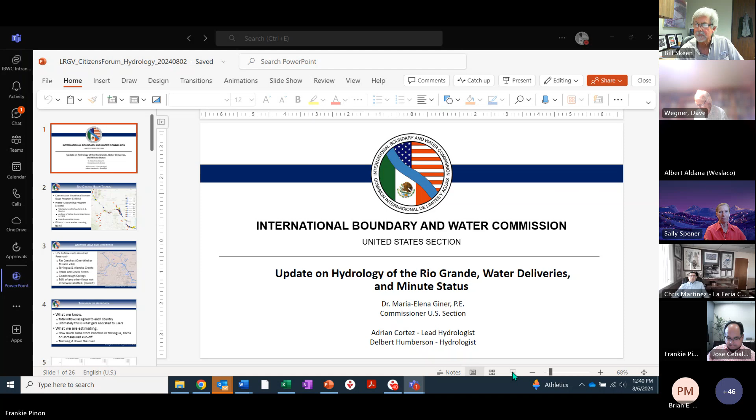Santiago Caicedo, report here, thank you. Historical Commission, Jason Labos. I'm supposed to get on a webinar. Daniel Gonzalez, Cedar Property. Elijah Goff, Texas General Land Office. Arthur Zeniga with Baskin Limited, Moreno. Michael Reyes, Ecological Services, U.S. Fish and Wildlife Service. Jack Cano with the LRGBC. Georgina Mayor, TCEQ, Rio Grande Watermaster. Arturo Cabello, Brownsville Irrigation District. Greg Harmon, Cameron County Irrigation District number 2 and Cameron County Drainage District number 3 and 7. Ruben Saldana, wearing two hats, Texas A&M AgriLife Extension Service and City Savings. I'm Paul Ross, I'm the A&M AgriLife Extension Service, College Station. My name is Ruben Oviedo, I'm the District Director for Congresswoman Monica de la Cruz, Texas 15. My name is Rene Perez, I'm with TCEQ, Border Affairs, Region 15. Colin McDonald, the Texas Water Foundation. Okay, I'm still in the Texas Master Naturalist Program. These 2 hours count as a class training.

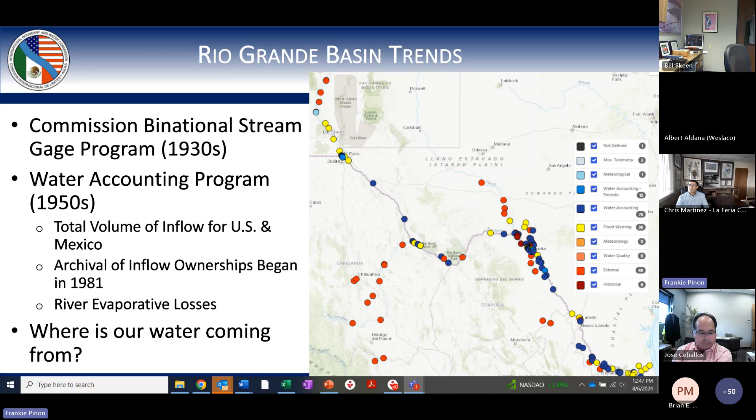So using that data, we're seeking to answer the question: where's our water from? If you're familiar with the treaty, then you already know this answer, but if not, I'll spell it out. If we're looking at Amistad Reservoir, the inflows that belong to the United States, as dictated by the treaty, include one-third of the Rio Conchos.

That comes in from Mexico, unless Minute 234 is in effect. That's a special agreement between the countries that lets us get more than one-third in the event that there's a five-year cycle that ends in a debt. You can imagine the second five-year cycle after that, it's hard to pay back that debt and meet that cycle's demands at just one-third, right?

So Minute 234 gets activated and we might get up to 100%, which is what happened in 2020. We were getting 100% of all the six tributaries that are named in Mexico. The other places we get water, Terlingua and Alamito Creeks. Those are, if you look here, we got Big Bend region, Alamito and Terlingua are right here, kind of between Presidio and Big Bend. That's 100% United States water.

Also belonging to the United States are the Pecos and Devils. So if you can see, am I standing your way? Can you guys see? Not there. Okay, we're familiar with it.

All right, so Amistad Reservoir, Amistad Reservoir is right here in the map, and the Pecos and Devils flow pretty much straight into the reservoir. They're also 100% United States water.

Also, Goodenough Springs is named in the treaty. You may or may not have heard of Goodenough Springs. If you have heard of it or haven't heard of it, it's been inundated by the lake now. We made the lake, it covered it, but we have a process in place to make sure we're still getting that water, because even though the lake covered it, that's still water coming in, and that is United States water.

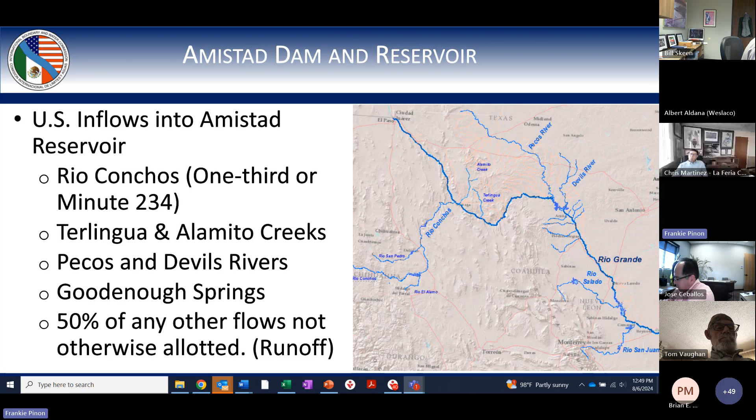Now that's all the stuff that's measured. We also have water that shows up - you can imagine there's a lot of unmeasured tributaries. When it rains, it flows, and when that shows up in the reservoir, we get 50% of that, and the other 50% goes to Mexico. So that's where our water comes from.

On the side, what we know from our historical accounting already and our archive data is what inflows belong to each country. We've done that math, figured it out, and that's what gets allocated to users. We do it with preliminary data on a weekly basis, we communicate frequently with TCEQ on that, and then we also do monthly accounting with final data.

Now, what's new is tracking exactly which water source that came from. So the way our accounting works is, here's a reach of river - maybe the Rio Grande comes in. We have water coming in from upstream on the Rio Grande, and we say, okay, based on our analysis, the water exiting this reach is 60% United States, 40% Mexico. Just an example, but then that's it.

We don't keep that fidelity of what percentage of that came from the Conchos, what percentage came from Alamito, right? And so then we move down to the next reach of river. We just know 60% United States, 40% Mexico, and we repeat that process. So in our accounting, the final number we have going into the reservoir, we know the percentage along with each country, but what was the exact source?

And this is what Adrian did. He did a new analysis that actually tracks the water by source. We regain that fidelity, and that's what we're estimating with this analysis we're going to go for. We're tracking those sources as they go down the river. You could probably imagine why that's important as we're entering these low storage periods, these low inflow periods.

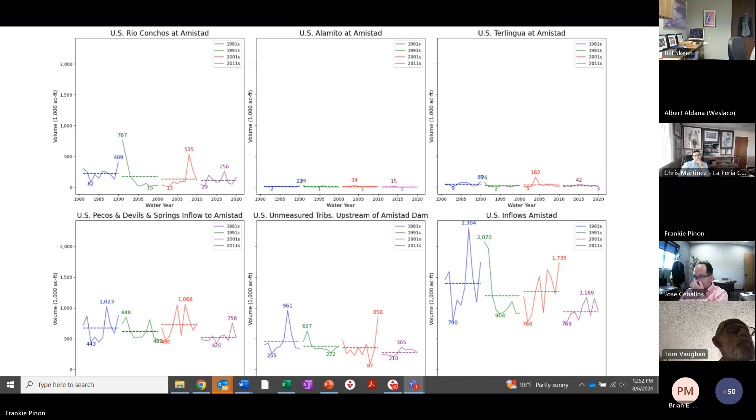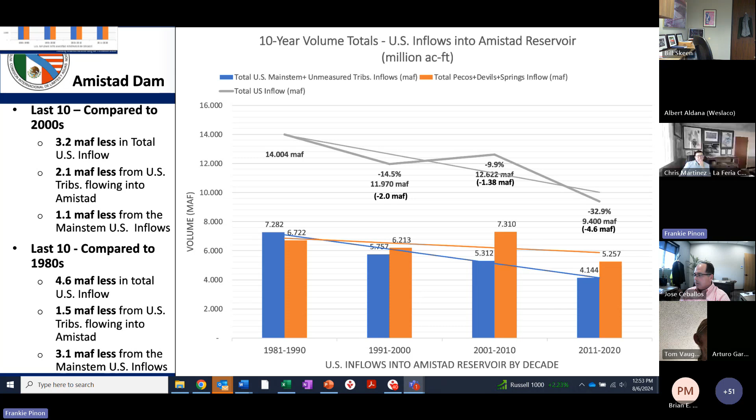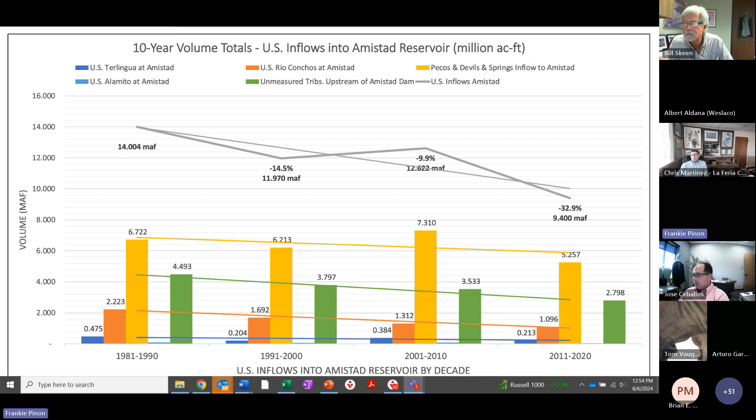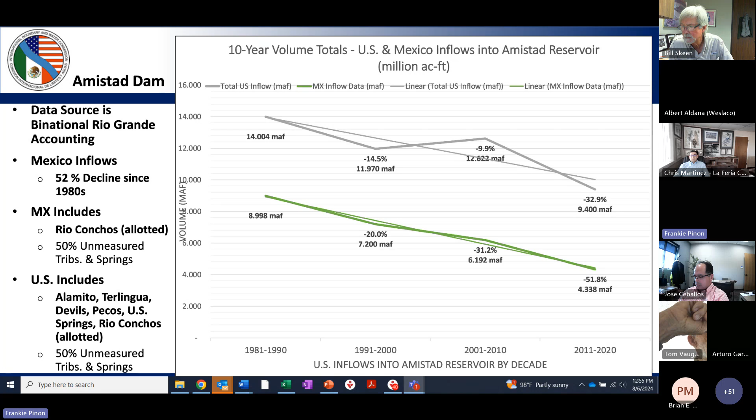But for them, because their overall volume is smaller, it's about 52% less for them. For us, it's about a 33% decline. Still a big number. Still a big number.

So let's talk about Falcon. Let's move downstream. What flows into Falcon that belongs to the United States? Well, we get 1/3 of the Mexican tributaries that are named in the treaty, or more, from Minute 234, just like the Rio Conchos. So you have Arroyo de las Vacas, the Rio San Diego, San Rodrigo, the Escondido, that's the middle Rio Grande tributaries, and then Rio Salado, which flows right here down into Falcon.

Oh sorry, that's not there. It's right here, down into Falcon. We also get Pinto Creek and San Felipe Creek, those are all 100% United States waters. And then, just like in Amistad, we get 50% of what's unmeasured. One thing to note, anything that we release out of Amistad also shows up in Falcon, but we removed those waters from this analysis. We are focusing on new water introduced to the system, because that water was already accounted for when it entered Amistad.

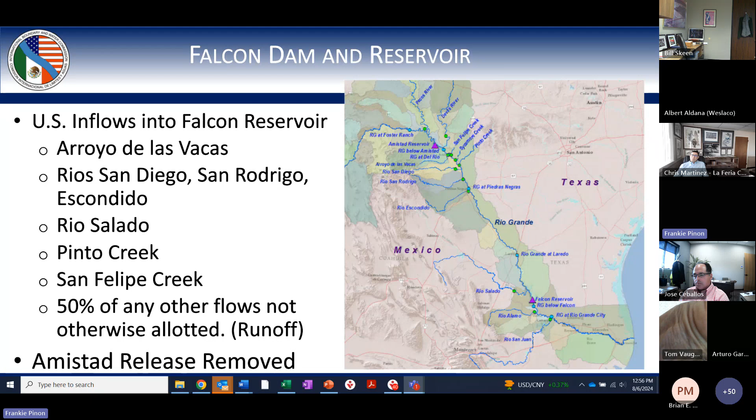Here's that same plot. Pinto Creek, San Felipe Creek, like the other creeks, Terlingua and Alamito, not a whole lot there. Here's the middle tributaries from Mexico: the Rio San Diego, San Rodrigo, Arroyo de las Vacas. That's the middle tributaries, a lot of variability from year to year.

Rio Salado, that's Hurricane Alex in 2010, pretty big outlier. But even without that outlier, you're looking at 21,000 acre feet and 300 something there. So there's a lot of variability in one. Same thing, y-axes are the same scale, so you can compare across.

Let's group it by decade. Same graph we saw for Amistad, but by source. Yellow is the middle tributaries from Mexico. Blue is the Rio Salado coming in at Falcon. And then this is the 50-50 water.

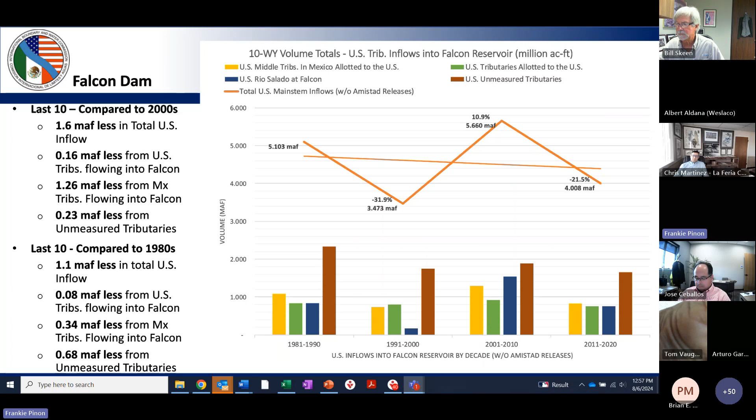The story here is not as drastic as we saw in Amistad, but it's still there. Since the 80s, the data show less water coming in each year. Looking here, it's about 1.1 million acre feet less, whereas Amistad was 4.6.

So in summary, we saw a big decline in flows in Amistad over this period, a 33% decrease, which breaks down annually to 460,000 acre feet a year. That's what it breaks down to in loss. A 24% decrease for US tributaries, and for Mexican tributaries, 51%.

That's Mexican tributary flow that belongs to the United States. Unmeasured tributary flow, 38%. Falcon, there's a breakdown ranging from 9 to 30%. That's the story we're seeing in the data - there's just less water entering the system in the last 40 years, less water entering the reservoirs.

If you want to target the slide - yes, just go back to the previous slide. One of the things that I think is important to highlight is this decrease in hydrologic water.

Mexico's decline could be made up with reservoir transfers, which is not reflected here. Reservoir transfers don't flow into the river - those are transferred ownership later. So that's not reflected in this analysis.

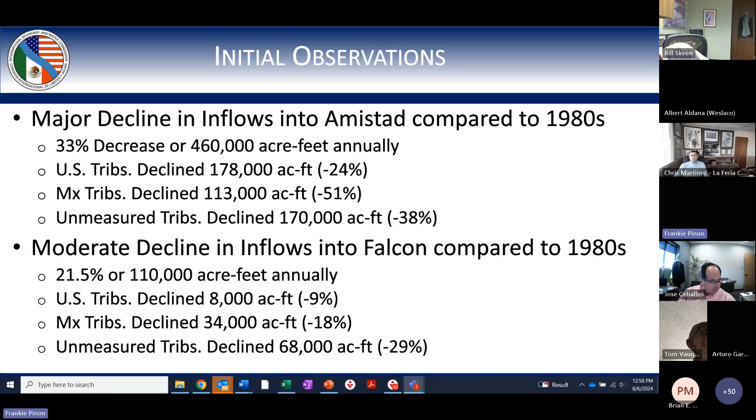What I have in the next slide, which I just realized is how small it is - let's go to the... oh, me, that's me, okay. Oh wow, this is really hard to... I just realized that. Okay, so what I did was, as part of my research, I also looked at the state water plan for 2022, and Jim Darling will be able to talk, I'm sure, circles around me on this.

But one of the things that I wanted to highlight with this presentation is that particular plan highlighted that 90% of the water from the Rio Grande Basin is what the region depended on, right? So what I'm trying to show with this, or what I asked Delbert to try and show, is that the region is vulnerable because it's a diminishing supply, but also because of the variability, okay?

The other thing that I wanted to show here is they do a projection of existing supply. First of all, the population in the region is expected to grow - let me hear it, oh there we go. If the region is expected to double in population by 2060, they are assuming a consistent existing supply that the Rio Grande is going to be providing, about 900,000 acre feet per year.

But the demands are 1.7 million acre feet per year. Now, 1.4 million of that is agriculture. So when there's less supply in the water and there's vulnerability, agriculture is what's hit, unfortunately, because of that, right? So right here, the deficit or the gap is about 900,000 acre feet.

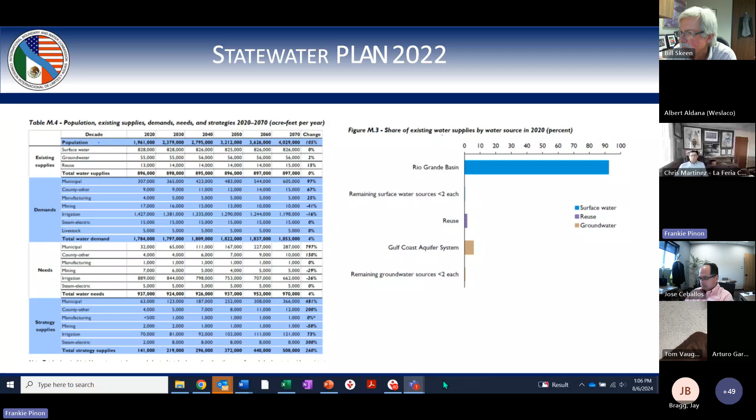Okay, let's go on to the next slides to show what's happening. As you know, Mexico is very much in arrears in their water deliveries. They are in arrears about 839,000 acre feet.

We've got until October of 2025 for them to make up that difference. On this x-axis are the years, on the y-axis is the volume. If Mexico were to make their annual average delivery of 350,000 acre feet, that would be the red dashed line.

Going back to the 1992-97 cycle, Mexico's ability to meet their threshold of 1.75 million acre feet has been a real challenge almost every single 5-year cycle, with the exception of the 2007-2010 cycle when Hurricane Alex hit.

So these are the other cycles. This one's the 2020 cycle—we're at, this is probably one of the better cycles, except at the end they had some debt from the cycle before, but they made it up at the end. This was the 2015 cycle, ending in 2015. This is the 2007 cycle. The 1997 cycle is when we started seeing problems, followed by the 2002 cycle that ended in 2002. This is where we're at now, shown in black.

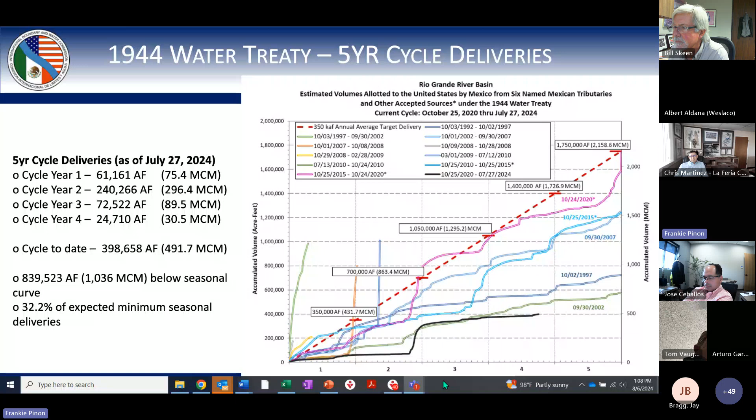And then, of course, our reservoir levels hit a record low on June 19th. I ask every week, Frank, did it rain this week? Please tell me it rained, please tell me it at least sprinkled, because that helps every time it's not hot. So I have it on my phone—I check on a regular basis just to see what the region is doing.

Hurricane Beryl, which we were hoping would go and park itself on Falcon, did not do that. We did get a little bit of a blip, and right now we are looking at doing projections like we did earlier this year, looking at if we had the same temperature pattern—we were looking at hitting power pool by August of this year.

What is power pool? Power pool doesn't mean we don't get water, it just means we can no longer use the outlets that deliver water to our hydroelectric power plants. At that point we have to use our other outlets, which aren't really configured to be on a permanent basis, and it could also create issues with the volume we could get out.

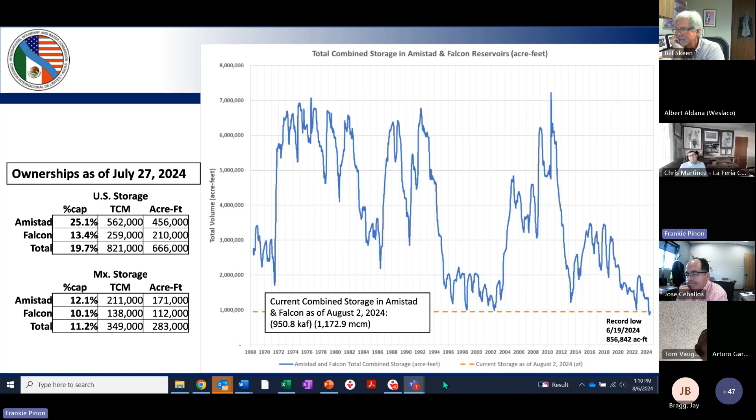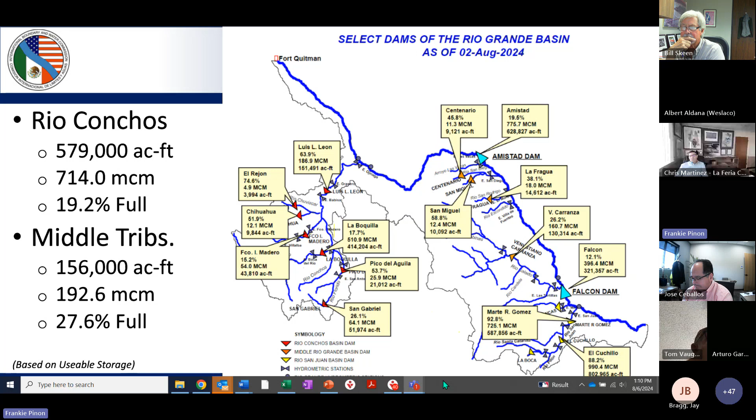But right now, as you can see, the US storage is about 600,000 acre feet, 666,000 acre feet. And these are the reservoir levels in Mexico: the Conchos has about 579,000 acre feet, and the middle tributaries have about 156,000 acre feet. Obviously we can't expect Mexico to deliver all of its water—even if they did, they'd still be in arrears. So yes, we are in a bit of a pickle right now, the region.

And they go back to Minute 234, which we've referred to a lot today, modification to the allocation of water deliveries. That was the last time any major change was made in how water is delivered to the United States. And so that's why this minute is hard. It's had pushback from Tamaulipas and from Chihuahua, and that has garnered a lot of attention.

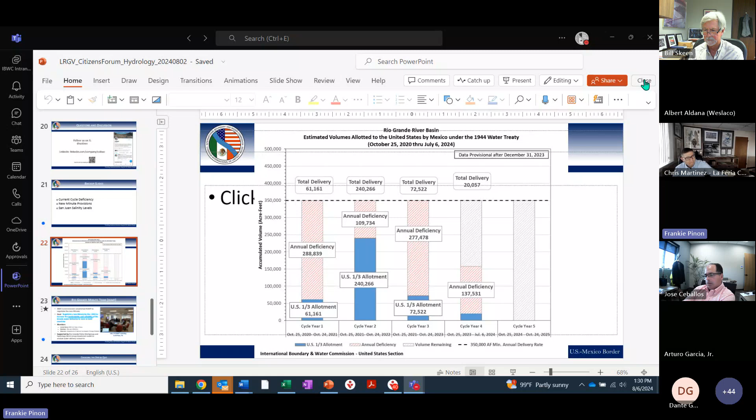So one of the things when I first started at this agency, I said there are multiple things I'm working on, aside from things that are in my control. Things that are in my control are staffing and budgets, and I can advocate for that.

So we've really been lucky. When I started at this agency, the operations and maintenance project budget for the entire border was about $45 million, and the average construction budget between 2010 and 2021 was $32 million a year for the entire border. We managed 2 international reservoirs, 2 international wastewater treatment plants, 500 miles of levees, 20,000 acre feet of floodplain, 800 boundary markers, and 2 ports of entry, I think I got it all, for $31 million a year for maintenance. And to be fair to members of Congress at that time, we had almost $200 million sitting in the bank that hadn't been obligated, so who's going to give you more money if you can't spend what you have?

So one of the things we've been really working hard at is getting all of our funding contracted. And part of that is I'm doing what I call my 3 legacies, my 3 legacy studies.

One is a manpower study. We just finished a manpower study. I have a fact sheet that we'll put out front - make sure all the board members get one first. That talks about the manpower study. I've already briefed members of Congress, different committees, and the administration on this.

Basically what we did was we determined that there was about 60 positions that this agency needed. We're only an agency of about 300, so that's like 20% more people. We've gotten a lot of support from all the members of Congress, and now we have the science to show these are the funding needs of the agency. We are doing a 4-year plan on staffing.

The other thing, when I got here, there was a vacancy rate of about 28%, almost 30%. We got that down to 9%. So we're filling positions. You guys, are you full? Are you all at your positions? We have one more, but the offer has been made. And all the positions here in the region have been filled.

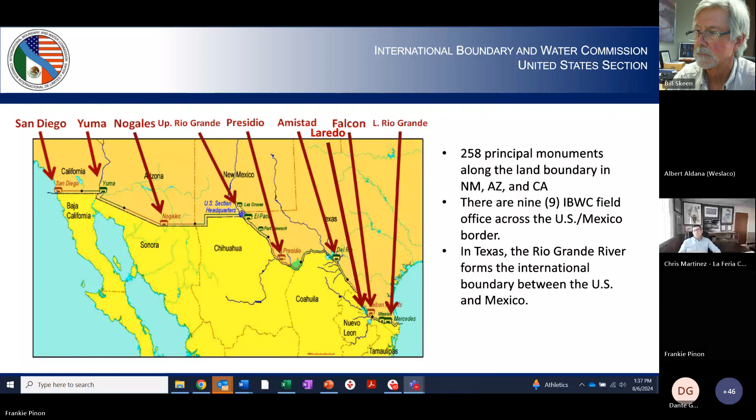I have only 4 equipment operators at grade 10. I have 2 positions for grade 8 equipment operators, actually one vacancy currently. Those are 2 different skill levels. I also have 1 servicer who fuels up everybody - that covers everything from Penitas, King Ranch, all the way down to the end of Brownsville, and one gentleman does that. I have 5 tractor operators. In a bit I'll show you how much acreage my 5 tractor operators here have to cover - quite a bit of property.

We have 1 maintenance mechanic who usually stays here, working mainly at the field office. I also have 2 heavy equipment mechanics, 2 welders, and 3 maintenance workers. The maintenance workers are the ones that go out into the field - they put up the traffic gates, fix all our gate well structures, weed eat around all our structures, and do that type of work. I also have 2 laborers.

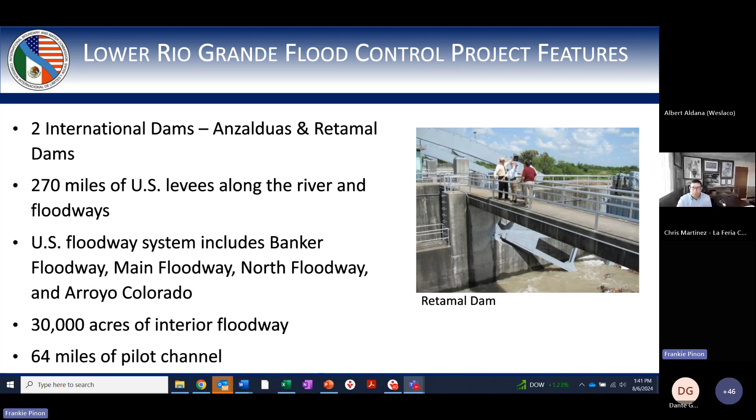We have 30,000 acres of interior floodway with 64 miles of pilot channel. On the lower Rio Grande flood design criteria, most of y'all know we carry 250,000 CFS at the Rio Grande City, 105,000 CFS into the US floodway at Anzalduas Dam. From there it's 21,000 CFS into the Arroyo Colorado and 84,000 CFS into the North Floodway.

That's done right here at the divider site, right at 1015. Then we have 105,000 CFS that goes into the Mexican floodway at Retamal Dam, which limits the flow to 20,000 CFS at the Brownsville, Matamoros area.

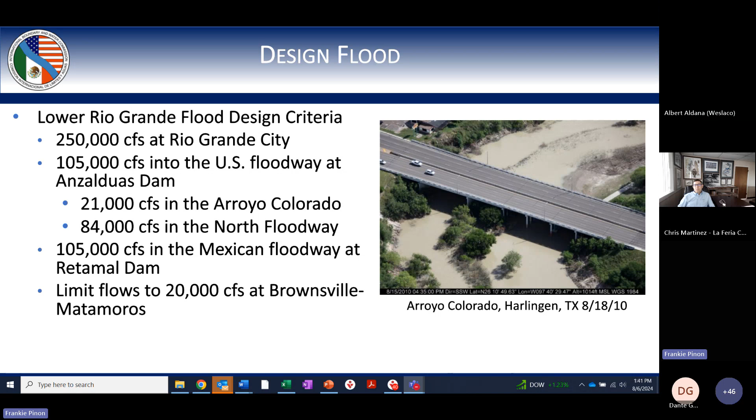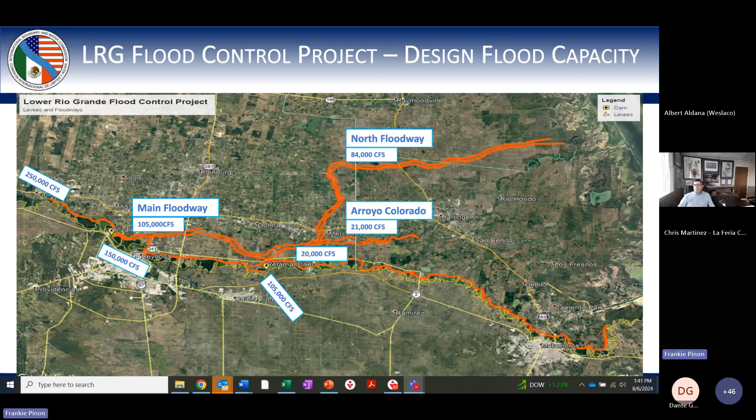Now, this is our map of our area of responsibility. Like I said, it goes Brownsville is here, King Ranch, Peñitas, and Panitas. So that covers all the area that I and my personnel are responsible for.

So the current operations of the Lower Rio Grande Field Office. We do levee roadway repairs, resurfacing, and slopes. We try to do approximately 20 miles a year. That doesn't mean we get 20 miles of brand new caliche - that's 20 miles of repair and whatever new caliche we get.

For levee and floodway mowing, we actually have, as you'll see in a later slide, over 12,000 acres. Our minimum without any overtime or anything like that, we usually can mow 8,500 of those acres. That's it - we cannot even complete 1 full cycle a year. So that's one of the issues we're addressing.

The manpower study helped with addressing that manpower shortage. The pilot channels and lateral drain desilting is approximately 15,000 cubic yards a year. We have 2 long reaches, and we just received a brand new regular excavator yesterday to help with all the desilting.

We do inspections and maintenance of irrigation and drainage structures - over 600 structures throughout our entire floodway. About approximately 100 of them are actually out of service, and then we have licensed structures also.

But we also have maintenance of the 10 floodgates, and I'll show you shortly here, we'll talk about floodgates. Then we have our flood workshop and exercise that we have to do annually.

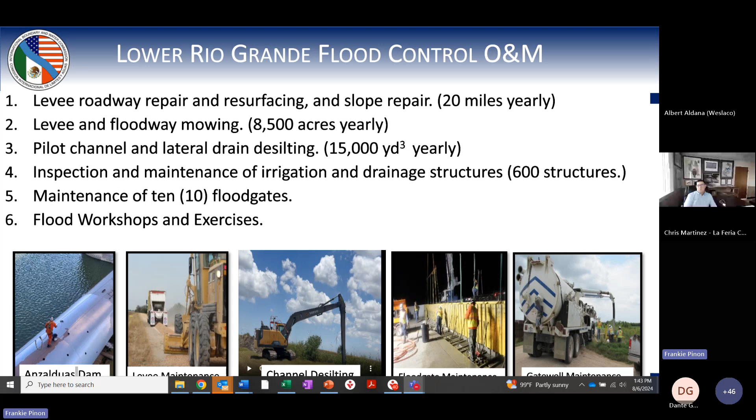Levee resurfacing and repair - maintenance of 270 miles of levee road. We try to resurface as much as we can. The river levee takes a lot of our time because there is a lot of traffic on it. As most of y'all know, anybody dealing down on the river levee, between Border Patrol, the Army National Guard, and everybody else, we are constantly on the river levee trying to keep it going.

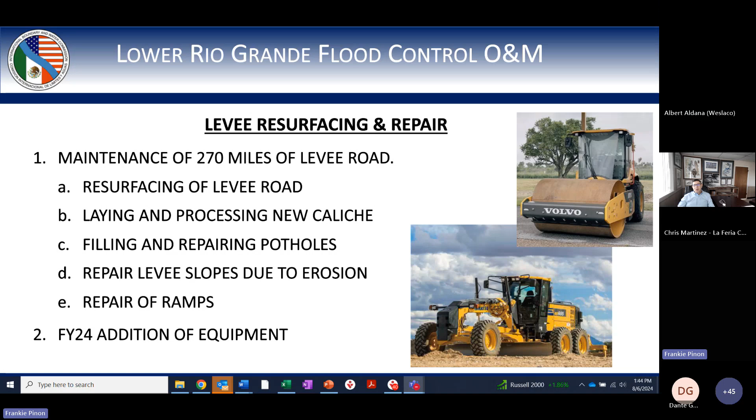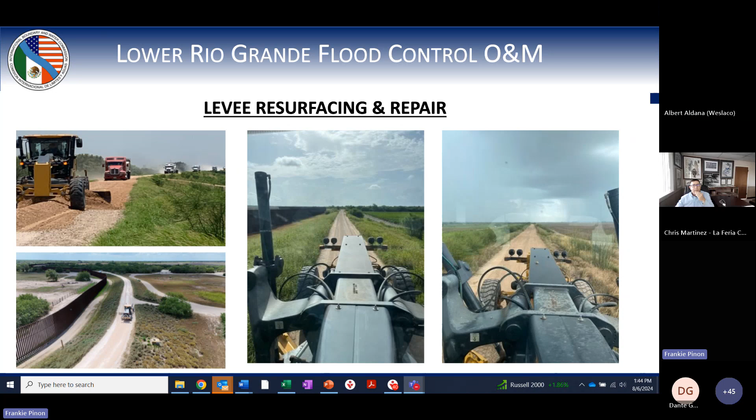Now we've gotten some new equipment this last year. This right here shows our grader before. Right here you'll see a before and after of just resurfacing. This is one where we actually received new caliche and processed it in.

And here's what I was telling you, where we try to mow our entire floodway of 12,000 acres. We've been lucky - we've been approved for overtime for the last several years. So that's how we meet the demand of mowing the 12,000 acres. We've been quite lucky on that.

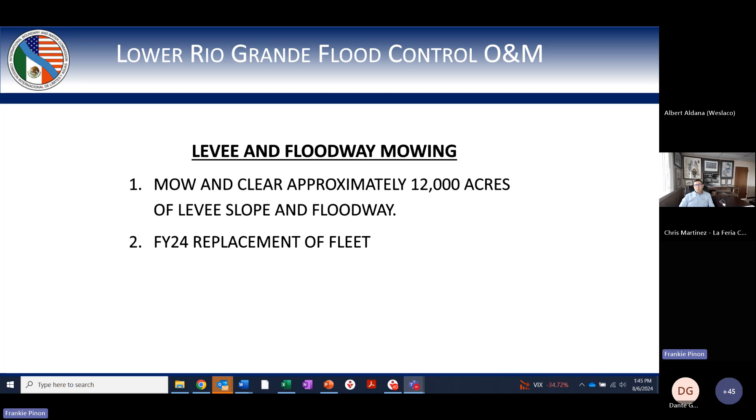Hopefully with the new manpower study and positions they're looking to give us in the future, we'll be able to do that without overtime. But of course, it's not only personnel - I'm also going to need equipment to go with that personnel. This last time we replaced our fleet of 6 tractors with 7. We actually purchased an extra tractor this round so we can utilize some of our other personnel into the tractor operating position as needed to help us. So that was one of the good things that happened this year - we replaced our entire tractor fleet.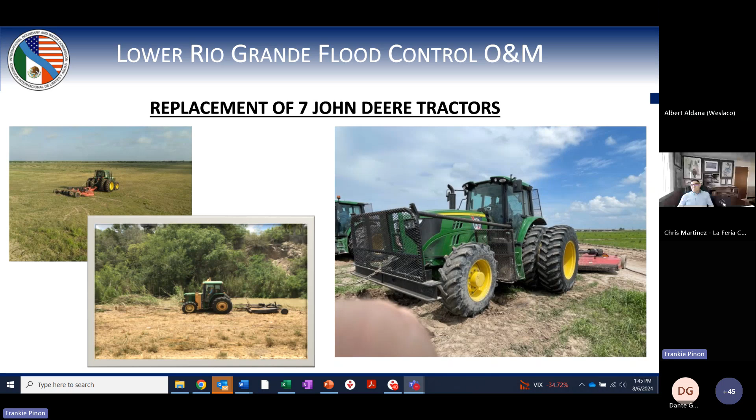We've had to spend time on this. The ones on the right are the older design, and this is the newer design with the heavier armament. Out there the trees get huge and our last batch of tractors got pretty beat up, so we've redesigned our armaments. Our welders in-house actually built that armament for our tractors so hopefully these things can last a little bit longer.

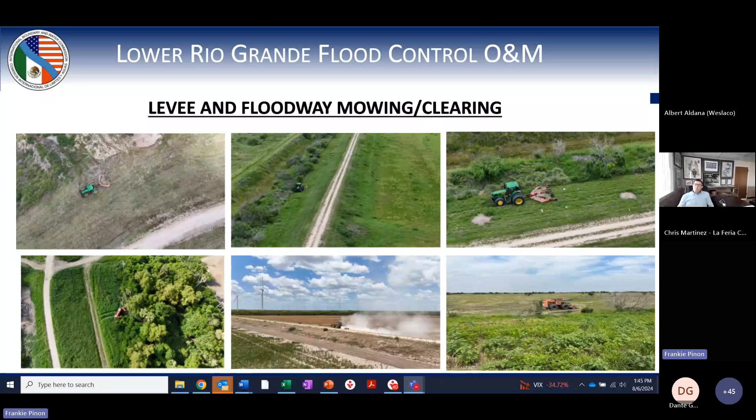This shows some of the areas that we mowed, the levees, the tractors out there, sometimes when it's green and other times when it's not so green out there.

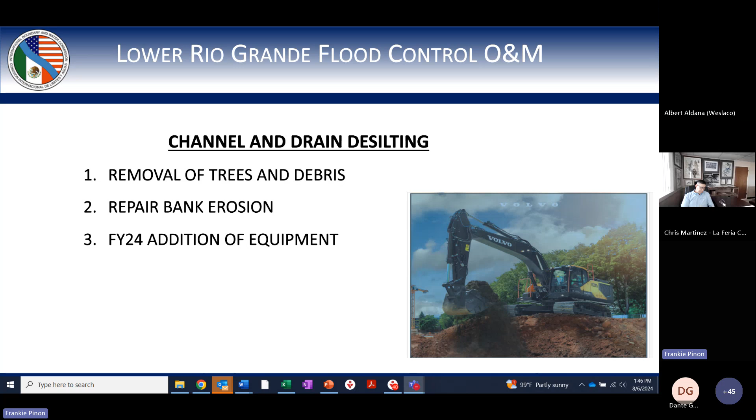Most of the time we do pretty good at desilting, but we can't get everything. We will never be able to do the entire pilot channel in one year. That's not realistic. It'll take us probably closer to a 10-year cycle to do the entire pilot channel system with all the laterals involved.

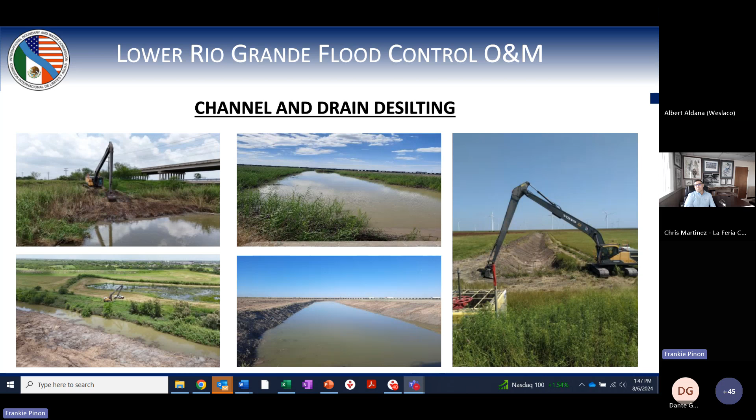We also do inspection and rehabilitation of structures. Every year we have to do the annual inspection. We have 523 structures within the IBWC floodway levees that are inspected annually. That's just the inspection, them going out there, weeding around it, going in and looking at it. That's it, and it takes literally two gentlemen almost the entire year just to do those inspections. I only have three maintenance workers and two laborers, so one maintenance worker and one laborer is tied up pretty much all year round just to do those inspections.

We also still have to do replacement of any sluice gates that we find damage to, weeding around structures, painting, stenciling, always keeping them labeled, and installing identification poles. Identification poles are just a marker on the levee that lets them know where the structure is so they don't run into it. This does not include the repairs that we have to do.

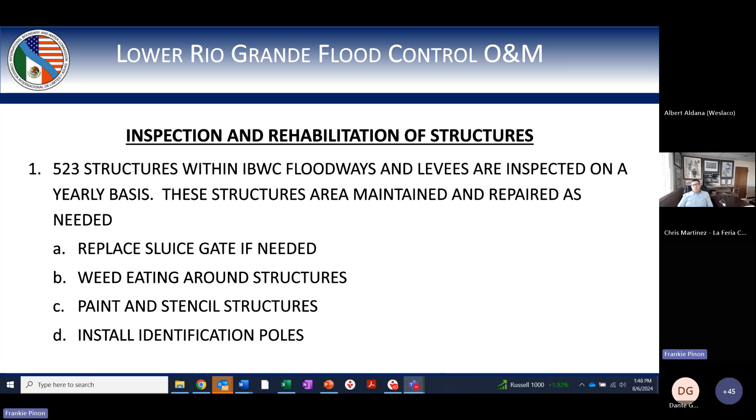Maintenance of the 10 floodgates. The floodgates are located at FM 107, there's one, and hopefully not too long we'll be losing that one. FM 491 has 2 of them. Business 83 has 2. Jackson Road has 2. Jackson Road is notorious for their floodgates getting damaged. It's a highly traveled, high-speed road, and we are actually in need of repairing Jackson Road currently. Bentsen Palm Road has 1, Hidalgo Port of Entry has 1, Alamo Road has 1. Every one of these floodgates is serviced annually except for Jackson Road.

Jackson Road, we have not been able to do it due to trying to get permission from TxDOT to shut down Jackson Road. TxDOT does not like shutting down Jackson Road since it's a main artery. In the past we were able to shut it down at nighttime and do the repairs, but that caused overtime for TxDOT. Right now TxDOT doesn't really want to spend that money on overtime, so we're trying to come up with a different way of doing it. The last time we had to do it during the day, we actually had to hire a contractor.

That costed us well over $200,000 for traffic control. At nighttime, we do a complete road shutdown, get in there, do our repairs. It takes approximately 8 nights, so we do one section every night for 8 nights and we're done. It's cost effective for us if they let us shut it down, but for them it's a hindrance and not cost effective.

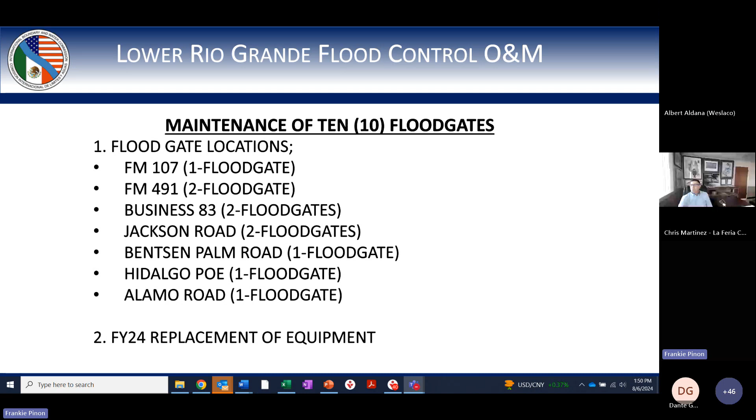And those gates, like I said, at 107, eventually they're looking at elevating the road, and that floodgate will go away, hopefully. This is some of the equipment we replaced for doing our floodgates.

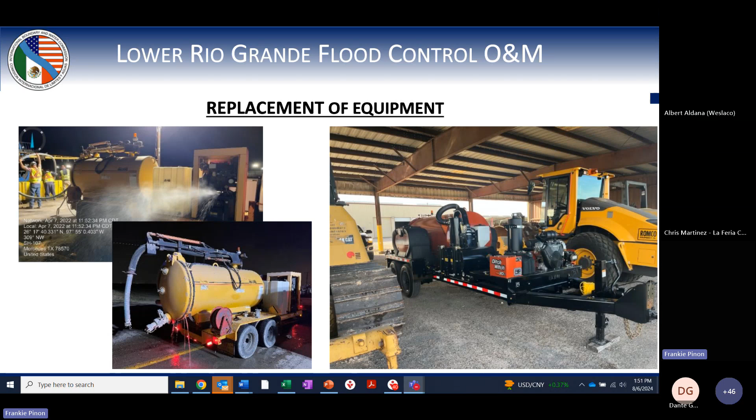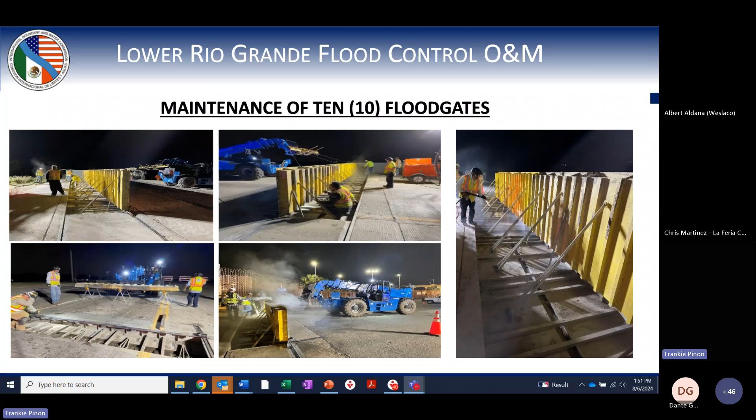We had to have some work done, and they came out and that's what they utilized. We learned a lot from them when they were here, so now we do all repairs on our floodgates ourselves. Last time we had flood breaks doing repairs on Jackson Road, it cost us almost $1 million just for the repairs. We've been able to do almost the exact same repairs in-house, saving quite a bit of money for our agency, which helps out a lot.

Now this is our flood workshop and exercise that we do annually. This year we didn't do it till June 25th. The reason is we usually try to do it in May, but this year a large group of us was down in San Diego helping with flood cleanup there. When we do this, I like to have as many of my staff here as possible, because if you don't utilize it, you forget it. Plus, I've had quite a few new people come aboard and they needed to be part of this exercise so they know what's going on.

When we do that, we go over and train them again on sandbagging, levee liners, boil controls, gator pumps, and the stop log insertion and removal.

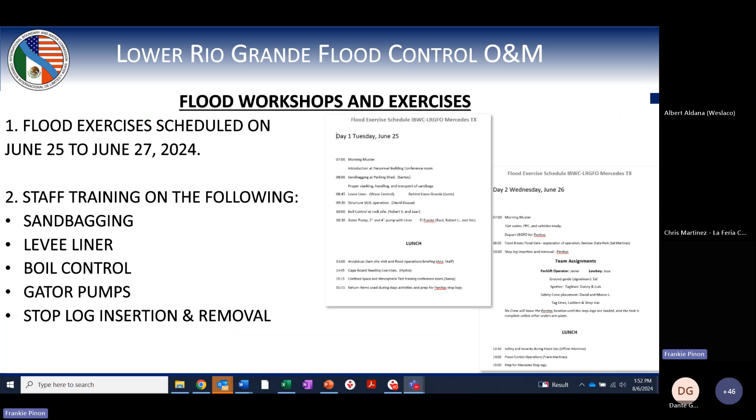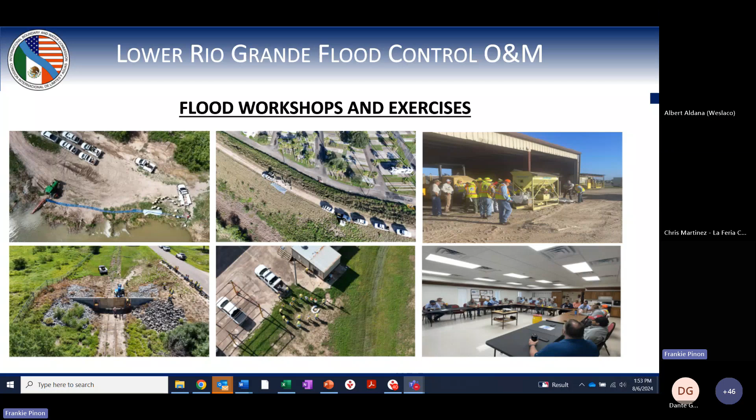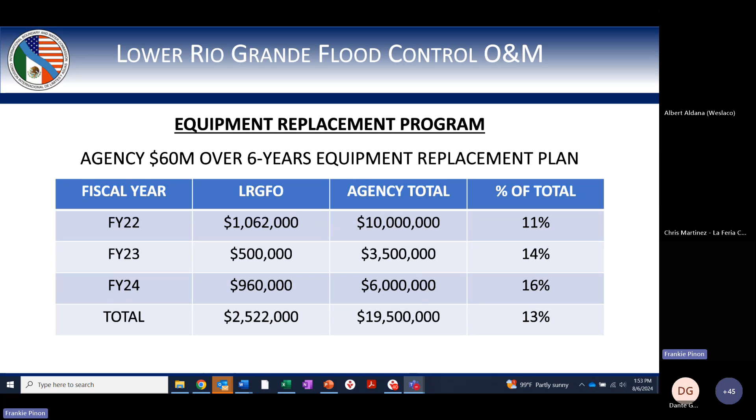Here is our equipment replacement program that the commissioner just mentioned. This shows for the fiscal year, our total and the percentage of how much we've spent. So far this year it was $960,000 for our equipment. 2022 was a big procurement of equipment, a large one. That's not when we got the equipment, that's when we bought it. It's been known to take well over a year for us to get a piece of equipment after buying it. Sometimes it just takes that long to get here.

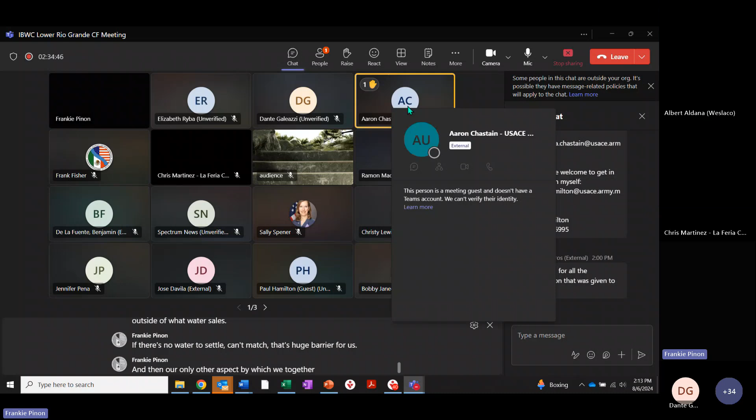Our only other aspect by which we could gather money, with the intent of maintaining the existing system, is flat rate. The water code does allow us to use taxes, but that has to be voted upon by the larger audience within our district, requiring an election. Very few districts have that in place. But those are really our only three revenue streams out there for the matching.

That's our biggest barrier, the matching aspect of it. I just had two WaterSMART projects from BOR approved yesterday - another 2 miles of irrigation. Now I've got to figure out how to match it. But they do take in-kind contributions, and that's the only way we can execute it.

It's just a matter - I have about another 16.5 miles of funding currently, spread over 9 years. If there's no consistency in expecting any kind of revenue stream along those timeframes, it grinds us to a halt. So even though there are revenue streams and availability for us to get those projects done, the limitations with the water code and availability of water almost prevent us from realistically taking on large scale programs to get these accomplished.

If the Texas legislature were to come up with a potential program where you could use their program as matching funds, that would probably help. Yes, but historically, once they see that we have funding from BOR, there's a reluctance to do a match.